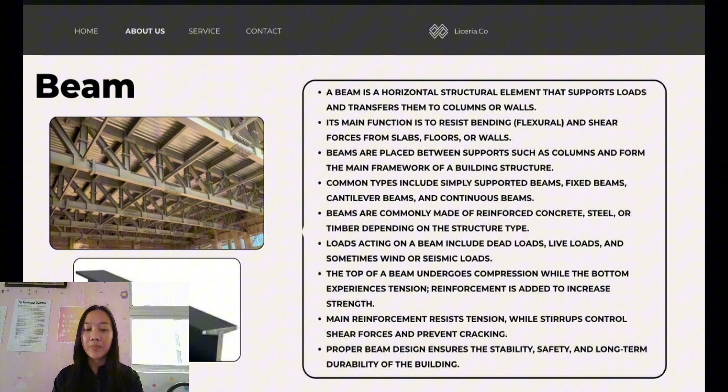Beams are commonly made of reinforced concrete, steel, or timber depending on the structure type. Load acting on a beam include dead load, live load, and sometimes wind or seismic load. The top of a beam undergoes compression while the bottom experiences tension. Reinforcement is added to increase strength. Main reinforcement resists tension while stirrups control shear forces and prevents cracking. Proper design ensures the stability, safety, and long-term durability of the building.

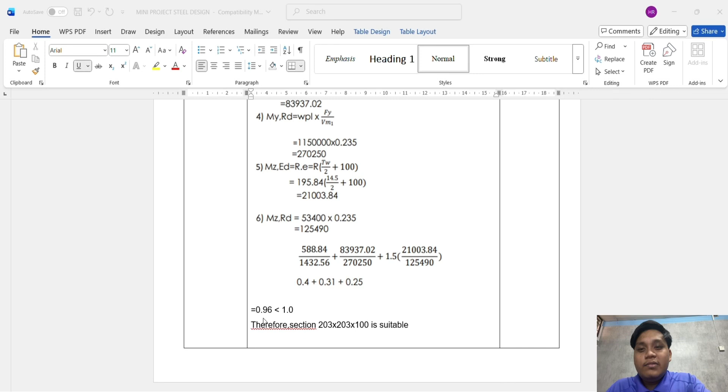Hi, my name is Siti Aisha. My matric number is 07DKA23F2032. Before we start, let me introduce the roof truss.

Roof truss is one of the most important structural components in single-story steel buildings, functioning to support and transfer roof loads safely to the purlins, beams, and ultimately to the columns and foundation.

The main point of the roof truss is to identify compression and tension members within the roof truss through structural analysis. By evaluating the actual force from permanent and variable loads, each member can be classified accordingly: compression members are checked for buckling, and tension members are assessed for tensile capacity.

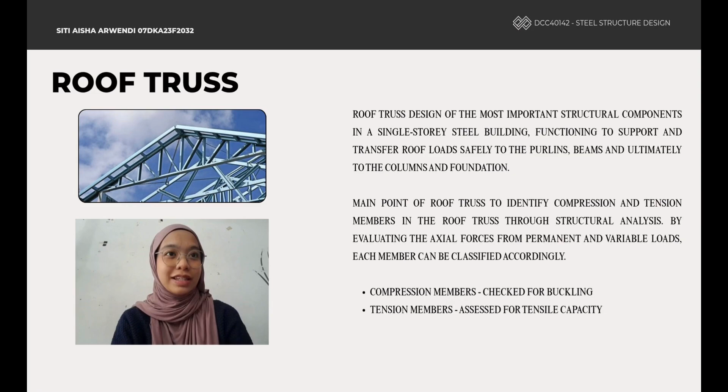Firstly, analysis of truss and determine the load at the node. Total dead load on slope, Gk, equals 0.46 kN per m square. Imposed load on slope, Qk, equals 0.60 kN per m square. The factored load Q follows the formula 1.35 Gk plus 1.5 Qk. Inserting the values of Gk and Qk, we get 0.56 kN per m square.

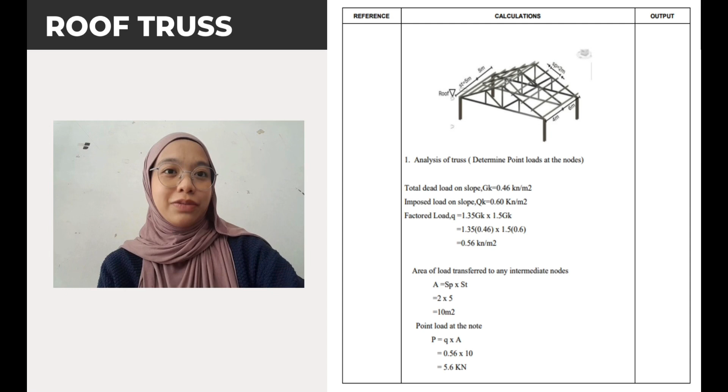Moving to the area of load transfer to intermediate nodes: SP by ST, 2 by 5, equals 10 m square, and the point load at node Q by A is 0.56 by 10, equals 5.6 kN.

Next, calculation of reaction force. For the roof truss, point load is 2.8 kN, and total length of the roof truss is 16 meter. Taking moment about A equals 0: 2.8 at 0 meter plus 5.6 at 4 meter plus 5.6 at 8 meter plus 5.6 at 12 meter plus 2.8 at 16 meter minus VE at 16 meter equals 0.

The answer we get is 179.2, then divide by 16. So the value for VE is 11.2 kN.

For FY: VA minus 2.8 minus 5.6 minus 5.6 minus 2.8 plus 11.2 equals 0. So the value of VA is 11.2 kN.

Next, calculation of internal force for each member: tension force NED is 18.66 kN, and compression force NED equals 16.8 kN. Total dead load on slope Gk we get is 0.46 kN per m square.

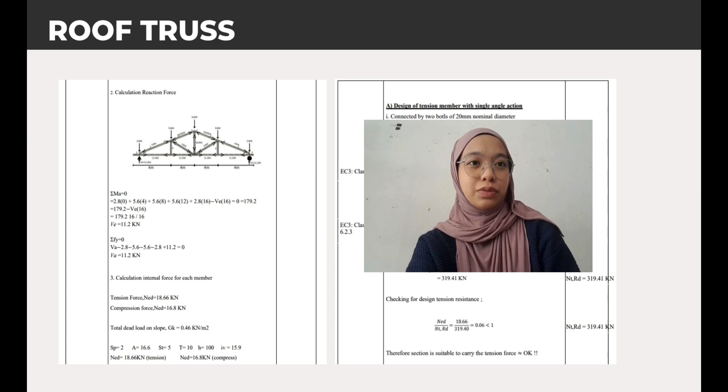The value of SP we get from the question: A equals 16.6, St equals 5, T equals 10, H equals 100, IV equals 15.9. Next, calculation for design of tension member with single angle section, which is connected by two bolts of 20 mm nominal diameter.

Tension force NEd is 18.66, with angle section 100 by 75 by 10 length. Referring to Eurocode 3 clause 3.1, design strength: Fy, with thickness 10 mm and steel grade S275 less than 40. Therefore Fy equals 275 Newton per mm square and Fu equals 430 N per mm square.

Next, Eurocode 3 clause 6.2.3. Using the formula NtRd equals A times Fy divided by gamma M0, where 0.9 times (1660 minus pi times 20 squared divided by 4, times 2) times 430 divided by 1.25. The value of NtRd we get is 319.41 kN.

Last, checking for design tension resistance. We use the formula NEd divided by NtRd equals 18.66 divided by 319.41 equals 0.06. This shows 0.06 is less than 1, therefore the section is suitable to carry the tension force.

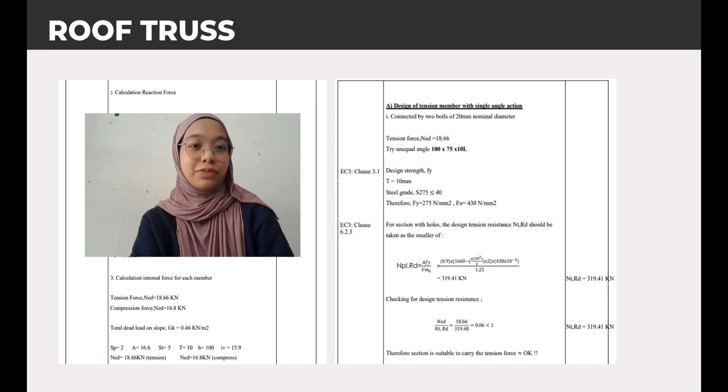Next, for part B: design of compression member with single angle section.

Which is connected by two bolts of 20 mm nominal diameter. Compression is given as 16.8 kN, with a unequal angle section 100 by 75 by 10, length as specified.

Design strength for Fy is 275 Newton per mm square, and value for Fu is 430 Newton per mm square. Refer to Eurocode 3, Table 3.1.

For the cross-section classification, using the formula from the table, we get epsilon equals 0.92, referring to Eurocode 3, clause 5.5. Referring to sheet 3, H divide T, which is 100 divide 10, we get 10, less than 15 epsilon.

Next, B plus H divide 2T equals 75 plus 100 divide 2 times 10. We get 8.75, less than 11.5 epsilon. So refer to Eurocode 3 clause.

6.3.1, the section is class 3 and not suitable, so for local buckling, radius of gyration IV is 15.9 mm. The largest slenderness, which is Lcr divide IV, hence the V minus V axis is the weakest axis. Buckling resistance of the weakest axis, V minus V axis. Refer to Eurocode 3, clause 6.3.1.

The formula given is NBRD equals chi times area times Fy divided by gamma M1.

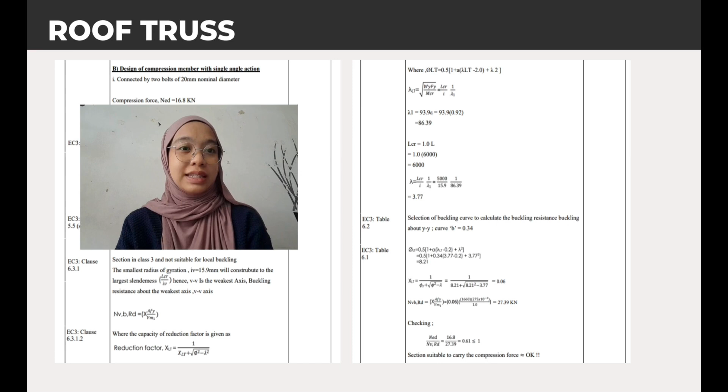So this section is suitable to carry the compression force.

A very good day to sir. My name is Anatasha Natalise and my matric number is 07DKA23F2061, and I will be presenting the connection designs for our single-story steel structure mini project.

In a steel structure, connections are very important components because they join different structural members such as beams, columns, and trusses into one complete and stable frame. The main purpose of connection is to transfer load safely between these members, including shear, tension, and moment, without causing failure or deformation. For this project, we design bolt connections following the requirements of Eurocode 3 to ensure safety and reliability.

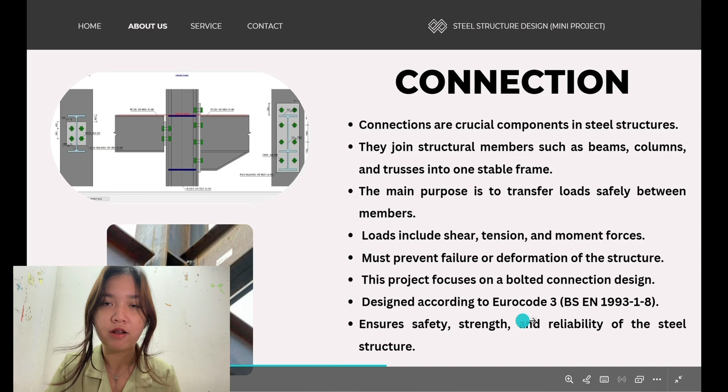Now, moving on to design solutions. The connection used 24 millimeter diameter bolts of grade 8.8. The applied load acting on joint 1 was 195 kilonewtons, and a total of 8 bolts were provided to resist these loads.

First, we calculate the direct shear on each bolt. The result is 24.48 kilonewtons per bolt. Next, we consider the torsional effect on the bolts due to eccentric loading, given a torsional shear of 77.41 kilonewtons.

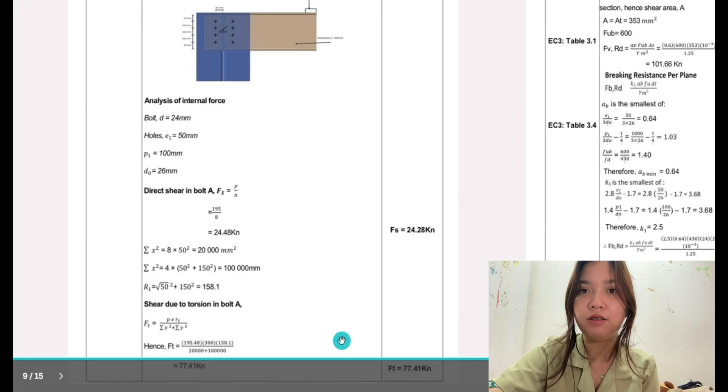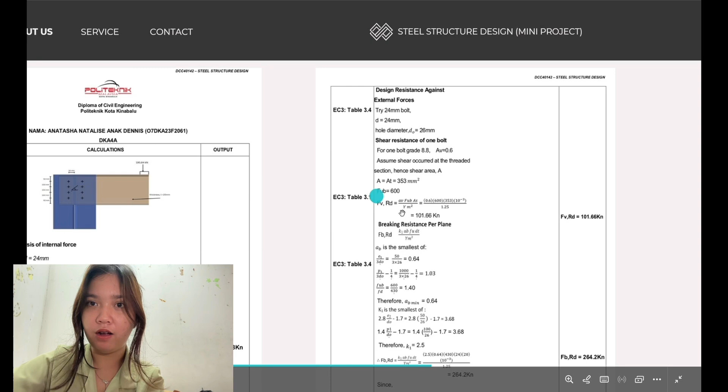These two factors represent the internal actions that each bolt must safely resist. According to Eurocode 3, Table 3.4, we then check the design resistance of the bolts. The shear resistance per bolt was 101.66 kilonewtons, and the bearing resistance was...

264.2 kilonewtons. Since the applied design shear force is less than the design resistance, the 24 mm bolt of grade 8.8 is safe and satisfactory for these connections.

In conclusion, the connection design meets all Eurocode 3 requirements and ensures that the joint can safely transfer the applied loads between the structural members. This step is essential to guarantee that the entire steel structure remains stable and secure under service conditions.

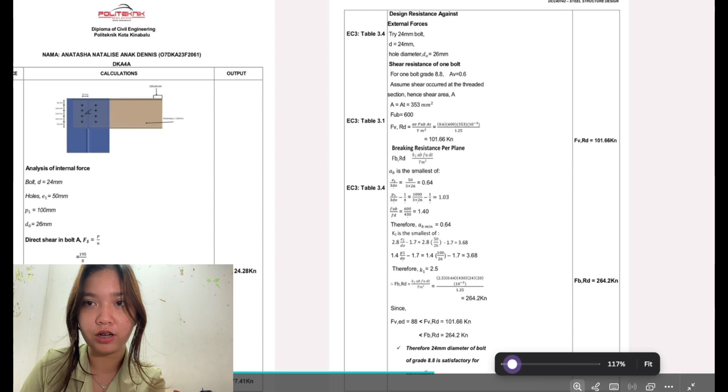In this analysis of external force, the applied load is 391.68 kilonewtons. We use a 30 mm bolt with an eccentricity of 250 mm.

First, we calculate the direct shear force using the formula, and the result is 39.16 kilonewtons. This means each bolt carries about 39 kilonewtons of shear force.

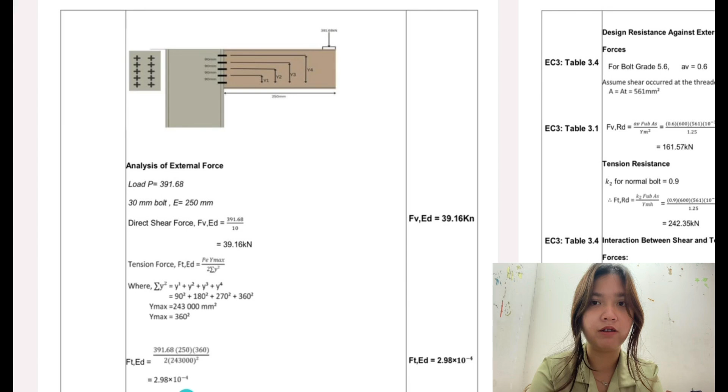Next, we find the tension force, and the calculations give a very small value, which is 2.98 times 10 to the minus 4. After that, we determine the design resistance of the bolt according to Eurocode 3, Table 3.4.

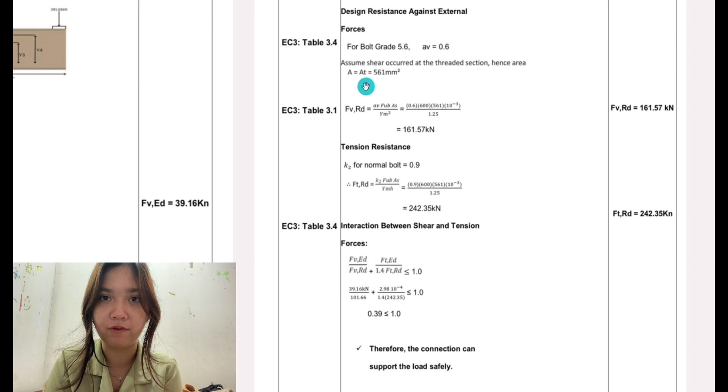For the shear resistance, the value is 161.57 kilonewtons, and for the tension resistance, the value is 242.35 kilonewtons. Then we check the interaction between shear and tension using the Eurocode 3 formula.

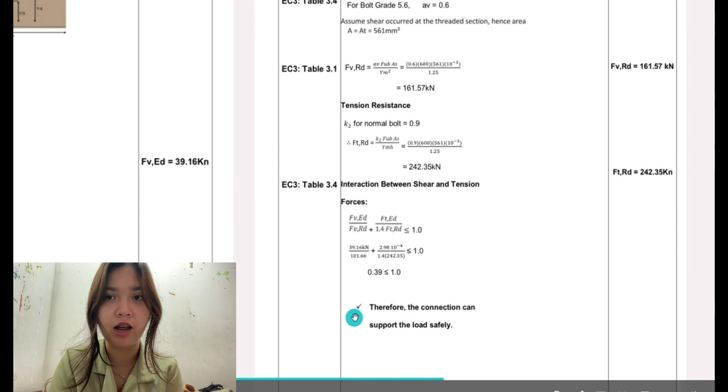The result is 0.39, which is less than 1.0. Since the value is below 1, it means the bolt connection is safe and able to resist the applied loads without any failure. So, in conclusion, this bolt connection design is safe and satisfies the Eurocode 3 requirements.